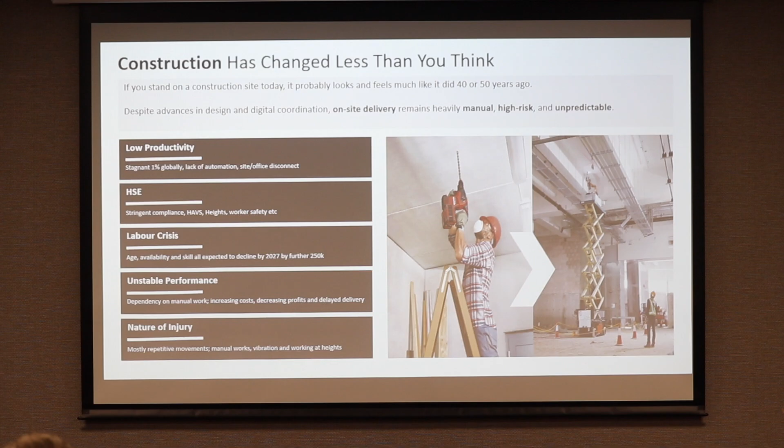Sorry, this is the slide I'm reading off now. The industry faces three linked challenges, and these are the principles to frame our discussion today. So safety, speed, and smartness.

Ken made a comment earlier about, years ago he heard, why can't we make construction more like manufacturing? Everyone in the room, myself included, will say every single site is different, and we always incur new challenges on every single site we're on.

So why now? The industry's ready. Digital foundations are in place. BIM adoption, CDEs, all of these things from the 2010 era. The groundwork has already been done.

2020 saw the data delivery and all the data being collected, which will drive real-time decisions on site, whether it's from concrete sensors or supply chain data. It's all been given in real time. So rather than making decisions in hindsight, we're making them in real time, which is obviously saving us money.

Now we're bringing the automation era, from 2025 onwards. It's not really the future of construction, but more just an upgrade on what we've been working on. Data has made it possible, robotics will make it real.

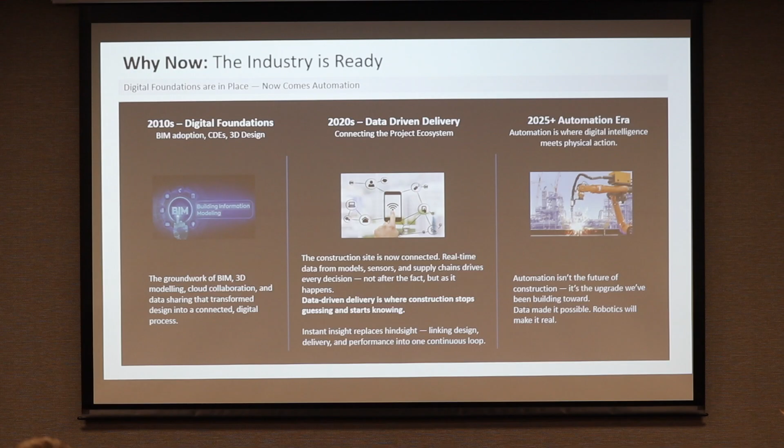So what automation looks like on site, a lot of you have seen things from other markets, but you've got task level automation with drilling, welding, rebar tying, polishing. There's pretty much a solution for everything now, it's just about trying to make it fit on that job site. Process level automation from robotic layout has been embedded in construction for years now, the HP site prints, Dusties, things like that.

Then you've got system level automation, which is integrated digital twins. My man who spoke before is a bit more clued up on that side of it. But the system level automation is really important, because as that advances, the robotics side will tie into those digital twins, and these decisions will be made in real time, and things will get a lot more efficient.

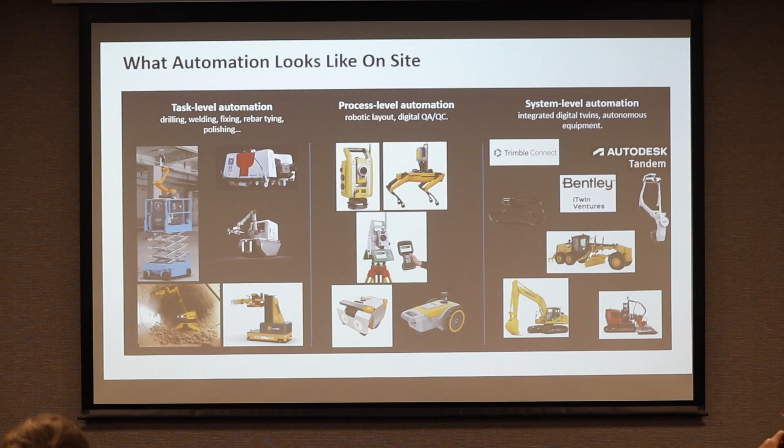So safer - it goes without saying that the big benefit with automation is being able to remove people from harm and from hazardous tasks. Hand-arm vibration is still a massive thing in the industry. I know we've been talking about it for a long time, and upgrades to these tools that let people use them for an extra 5 minutes a day doesn't really protect them. So actually being able to remove them from those situations entirely is where we need to look at moving the industry. Silica dust exposure, working at heights, still a massive thing in the industry as well. But automating tasks in confined spaces, rather than having the worker doing those tasks themselves, keeping them in safe zones - they'll still need to be involved in the robotic situation.

Faster - it goes without saying that robots don't need to take breaks like humans do. They don't need cigarettes, they don't need to go to the toilet. So the machines can work overnight if the sites allow you to - that's another thing, but they can. They don't fatigue. You essentially just change the battery on a lot of these projects.

Reduce rework due to precision layout and QA automation. Predictable cycle time - so if you're drilling, a repetitive situation would be, and I'll talk about it in a minute, like a base plate application, M24 by 135. You've got 6,000 holes to do, we can tell you exactly how long it's taken, it's recording every single hole. That means that application layout becomes predictable over the next days, weeks.

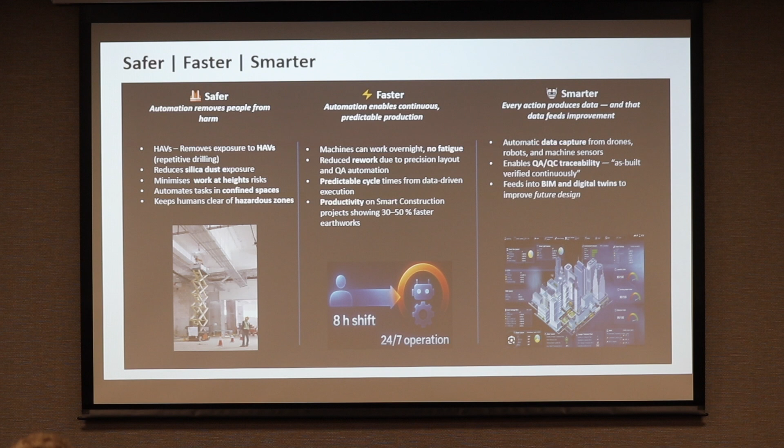Smarter - every action produces data that will feed into the digital twin information as well. So the automatic data capture from drones, robots, machine sensors, that will all feed into the system and update in real time. So that is something that is going to really hyperscale this industry over the next 5 years and onwards.

So a couple of case studies - I've just got things that we're working on at the moment rather than going into competitors. I'm not going to say competitors loosely because I don't think there really are competitors in this space at the moment. This is an automated car park in Hong Kong. It's a boundary crossing facility where, if people were going to the airport or sightseeing around Hong Kong, they would park their cars and leave them there for a couple of weeks. So it's an automated car park - you park the car, it moves where it needs to be.

The application was heavy drilling, structural steel application. So the base plates, 1,500 base plates in total. Number of holes to drill was 6,000, and the drill size was 24 mil diameter and 135 mil depth.

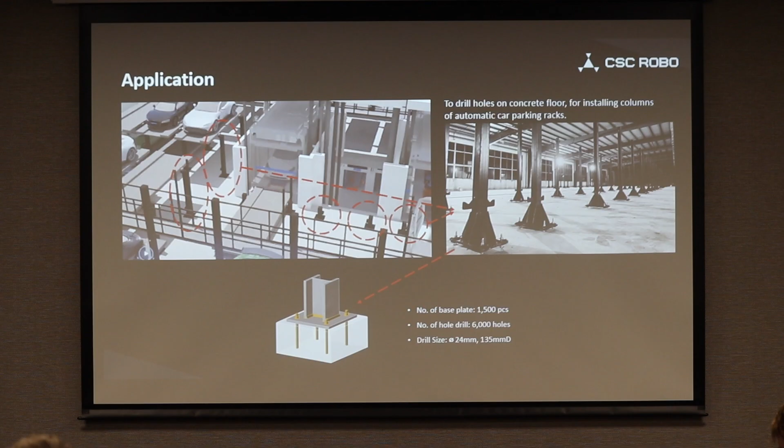I haven't got any videos because we don't really have the time, but I've screenshot a couple of things here. Essentially, we automated this process with our DF, which is a fully autonomous floor drilling machine. It drills downwards into the floor, horizontally, and into ceiling applications.

It weighs around 500 kilos, so it's not something you can mount or integrate into a scissor lift and lift it. There are obviously height restrictions of about 3 meters, depending on where the arm can go.

The average drilling rate for a human was 3 to 4 minutes per hole, including marking, positioning, drilling, and minor repositioning. The robotic system was 1.5 to 2 minutes per hole, giving significant productivity gains on this.

It's attached with LiDAR. The Revit kind of BIM model was uploaded into the document, so it knew exactly where to go. The base plate dimensions are all the same, so the robot was taught to use the calculations of the base plate for really repetitive marking and drilling.

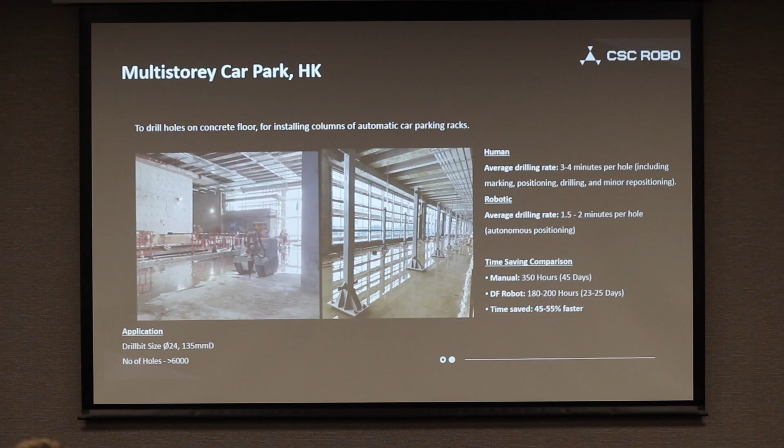Another project we did was a water treatment plant in Hong Kong. Similar situation, drill bit size was 14 mil by 110. It was 800 holes. Time saving compared to a human operator: the DF robot took 10 hours, and the manual approach was 20 to 26 hours.

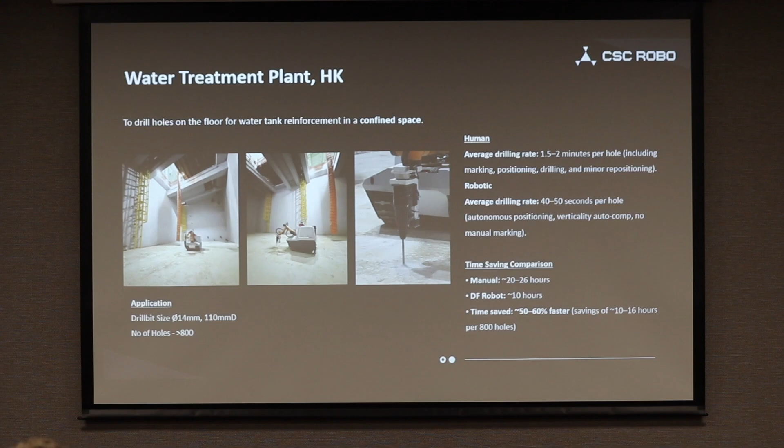Project we did with Bouygues in Hong Kong again. It was the T2 trunk tunnel, which is a bit of a flagship project over there. There were 18,000 holes to do in the tunnel, all overhead drilling.

This was the D2 model, and we've now upgraded it to the D3. It's an overhead drilling, hole cleaning, and anchor installation robot, so it actually takes on all three tasks.

The layout option will come, but we wanted to stick to what was hazardous. Cost savings in that side of the world are very different to here, the labour is a lot cheaper. So I understand here a massive cost saving would be if it can do the layout, the drilling, and the hole cleaning. That will be the next step.

But with regard to this, we clean the hole. We used, I think it was 10 mil by 57 wedge anchors. So it can autonomously drill the hole, clean the hole, and then install the wedge anchor.

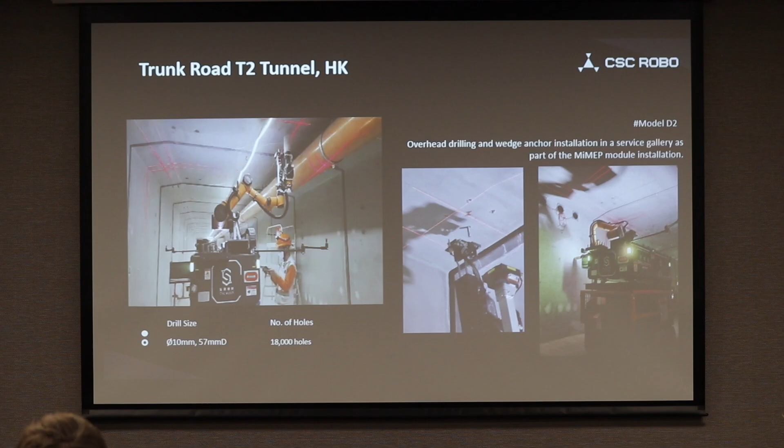The same model, the D2, was also used in a logistics centre. So obviously you can see here a prime example of working at heights. We've removed the operator from the high risk task, removed him from drilling overhead, and removed him from any kind of silica dust exposure as well.

And the operator there is on the ground, just monitoring. Everything's pre-programmed into the tablet. As long as it's in the working area of 2.5 meters, it will drill and find the holes using AI. It will auto-recognize where it needs to drill, and it will undertake those tasks.

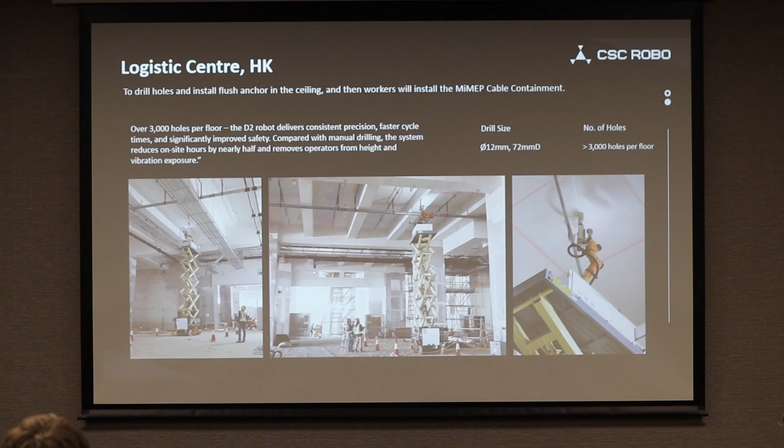As you can imagine, in the future now, automation is becoming a big thing, and major projects like HS2, who we're working with now, embed automation and robotics into their procurement tenders. So anything they're winning the business on, they now have to bring a robotic solution for those high-risk tasks. Not only can they not get the labour, but they want to automate the drilling in a tunnel.

So we've got a couple of projects coming up now that I'm really excited about with HS2, with Costain, and the joint ventures with Vinci and Balfour Beatty, which will be, they've got 13 tunnels, one of which has got 64,000 holes for the lighting, and also some cable mounting on the side, which is going to be about 80,000 holes as well. So the prime example of this would be horizontal drilling using the D3.

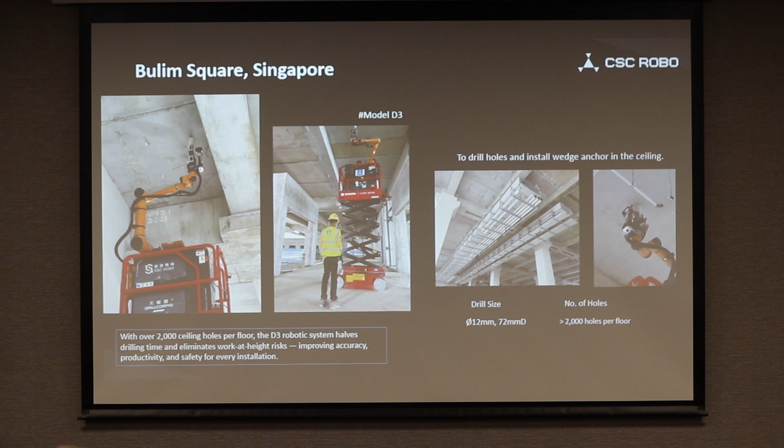We're going to have live scenarios from, say, March, April next year, ready for 2027 deployment. And the desired outcome on one tunnel will be two gangs, a north and a south, and they'll have 2 robots in each, and they'll both be working through the night. So hopefully we can speed up the HS2 delivery plan.